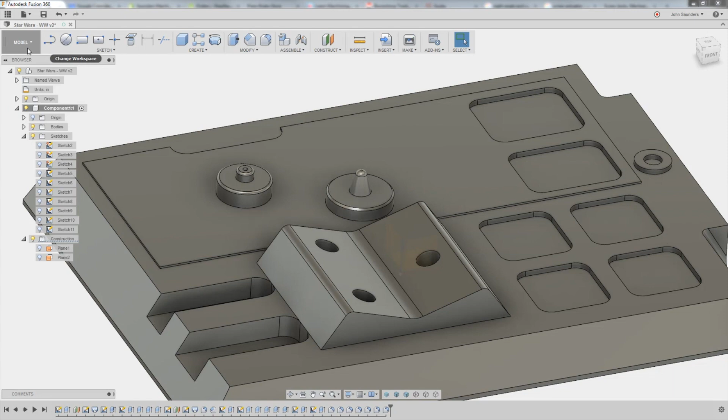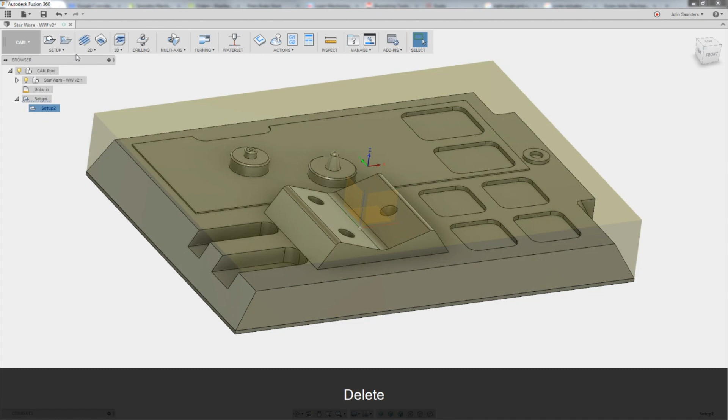New setup. It'll be a fixed size box, 8x6 by 1.22. Looks good to me. Okay, now the goal here is KISS, keep it simple. 3D adaptive, that screams shear hog. Never have liked the filters, at least so far.

Okay, here we go. I really should be using a template. I need to clean up my templates and then get them back to being used. We'll share our templates for sure once we get them fixed. Okay, so actually let me fix this real quick. So the bottom height, this is important.

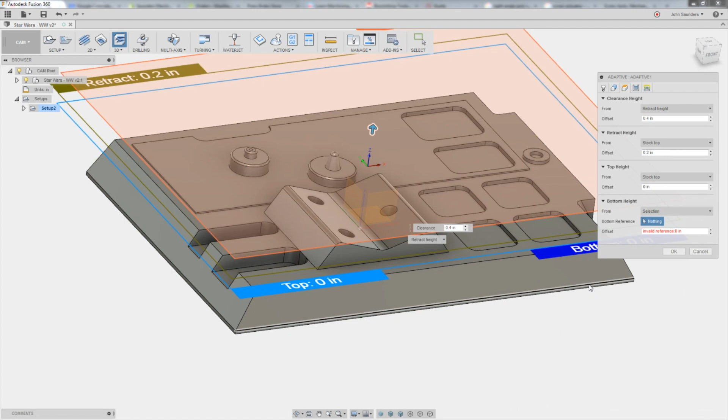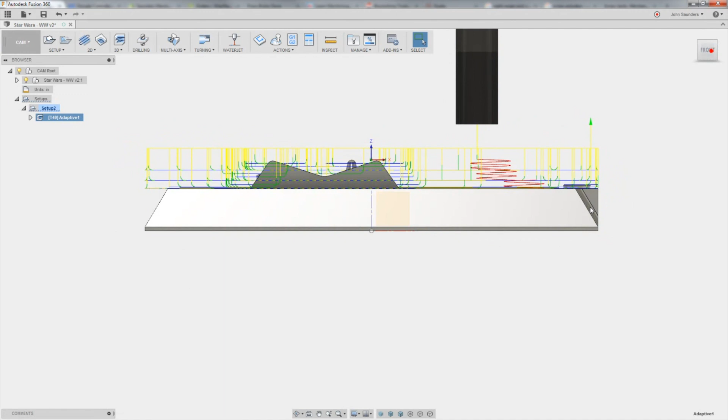So obviously we want 3D adaptive to take into account the various 3D features, but I want it to come down a little bit lower here. See how it's not getting any of this tapered? And we're just roughing it, but I still want it to do that. The reason it's not is under geometry, it's got tool center on boundary, so it's locking the tool path to this boundary, right at the center of the tool, that's as far as you can go. I don't really care here, so we can just say tool center, tool outside of boundary. See if that makes it any better.

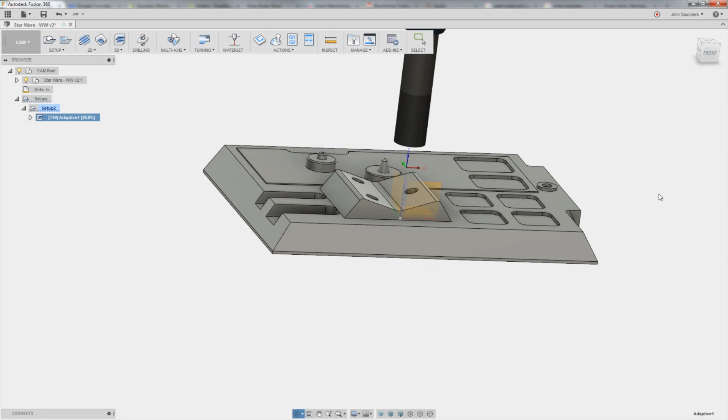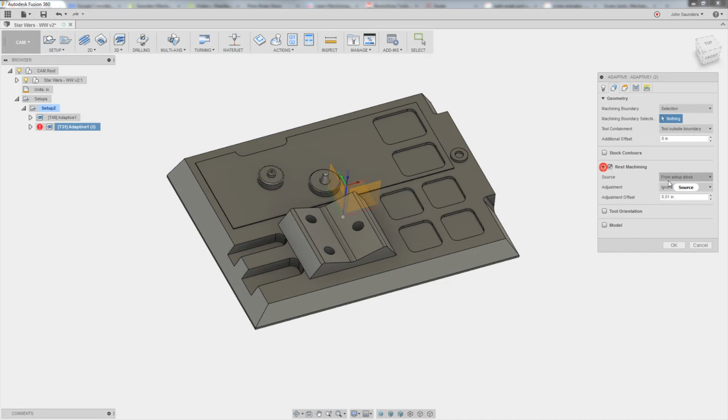Looks much better. Awesome. We'll hit Control D, duplicate that exact same op, but let's come in with a 1/4 inch square shouldered end mill for now to do the same thing, but then we'll check rest machining from previous operations, and that's going to go through and look at what's left to be machined. So in other words, what couldn't the shear hog get into? I'm sure it'll be some areas in here, hopefully some areas inside of here, maybe some corners, that kind of stuff.

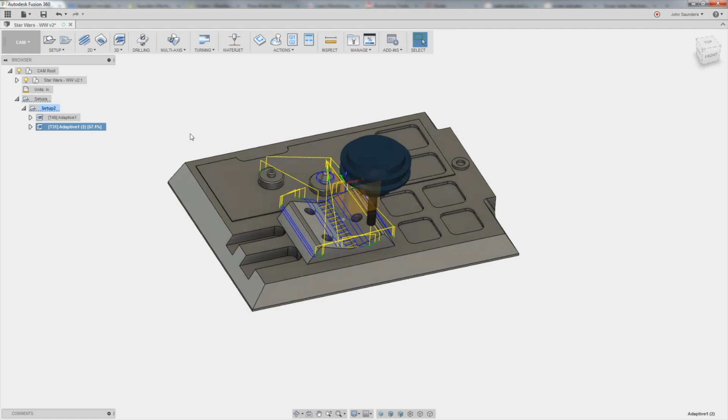These rest machining ops and the adaptive ops both take a lot more time to compute for obvious reasons. So if I get something locked down in this instance, I may want to right click on it and choose protect. That way if I hop in or if I do something, I don't accidentally force it to regen the whole time. So that's exactly what I was hoping to see.

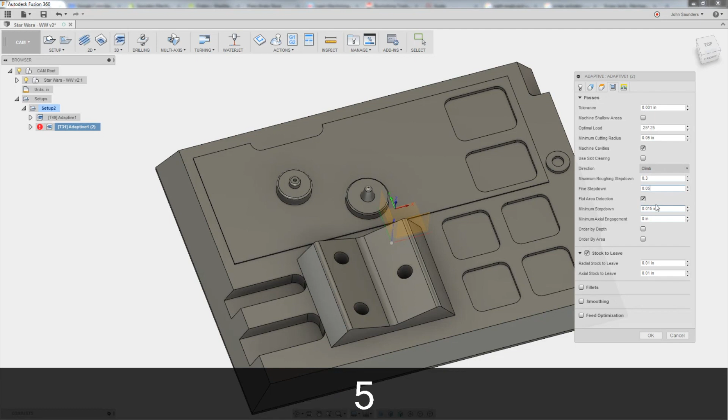I'm going to edit my step over here. Optimal load. Oh, that's because I adjusted for the shear hog. So I'm going to only go say 0.25 times 0.25, so that should be 0.0625. Step down can be 0.3. Fine step down 0.1 for now, and we'll say 0.05. Looks good. Click OK.

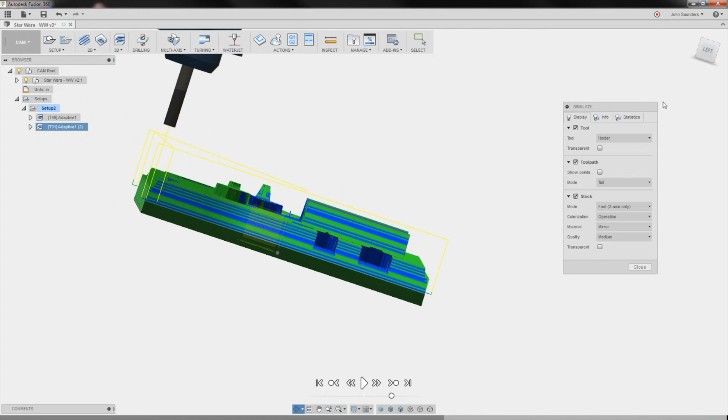Cool, so let's do a sim and just see what we're at, where we're at. Awesome, actually it's not really that bad. So I don't know, did it get? Yeah, I got some of that. Didn't get a ton of this side stuff. I think I'm going to allow the toolpath some additional offset because it's not going all the way down as far as it can. So under additional boundary, I'm just going to say 1 inch.

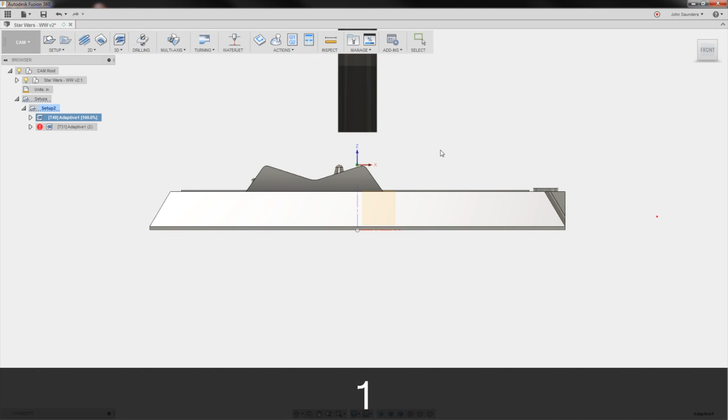That's way too much, but it's a smart strategy, so it's not going to cut air, and there's nothing else that it's going to collide into on the outside, the perimeter of the model. So this actually should do a better job. See that? See how it's now actually going all the way down as we would hope and expect? Great.

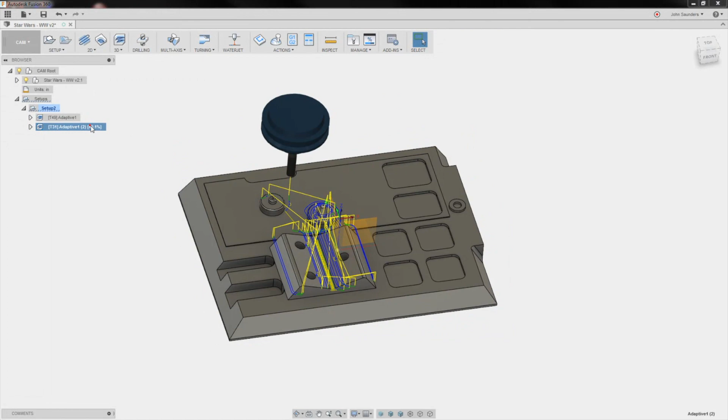So again, if you guys didn't watch the CAD video, this is my fun treat to myself. You know, I love machining, but when it becomes your job, it's different, and this is my fun part. I have no expectations here other than to enjoy the process. Hope that you guys learned something in the CAD video, and we'll go set this up on the Tormach, and we'll let her rip, and hey, you know, it'll probably be an hour or two toolpath, but you know, who cares? We're just having fun.

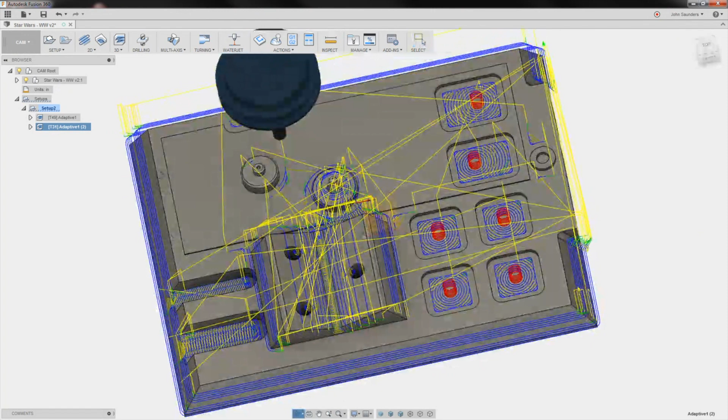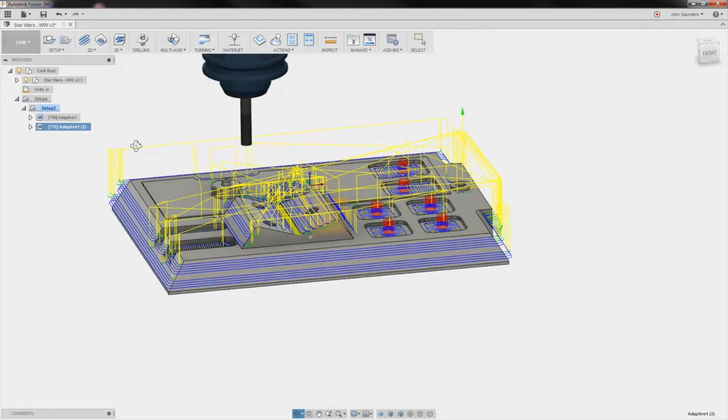Boom, boom, boom. Okay, so we got the rough shape out, a lot of these pockets are out. So here's the question, do I want to... I guess I'm going to come back with the horizontal and clean this up because we're still leaving some axial stock. With the shear hog, we need to. With the 1/4 inch tool, I wouldn't always do that, but horizontal will be good here. It'll add a little bit of time, but that's okay.

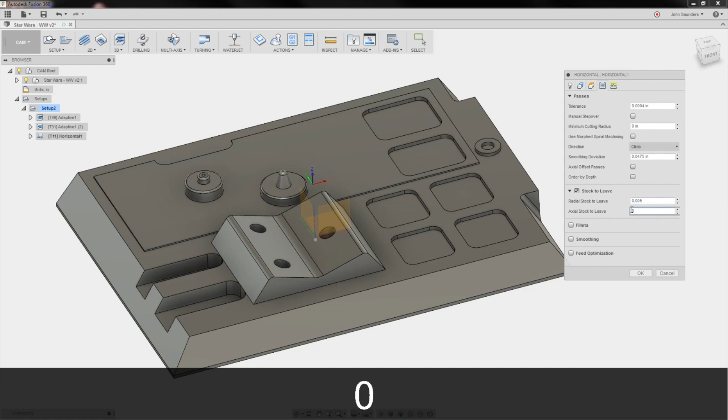So let's say 3D horizontal. And you know what we might do? I might actually switch over to, I've got this tool that I don't use very often, tool 11. It's a roughing end mill, actually does a great job with floor finishes. It's from Maritool, sort of ironically, I don't think of them as always the cutting tool source. And what we'll do is we'll do stock to leave. It's a corncob end mill, so I don't want it to touch any of the sidewalls. So we'll say give it 5 thou radial, but obviously no axial. Let's just click OK and see where it generates tool paths.

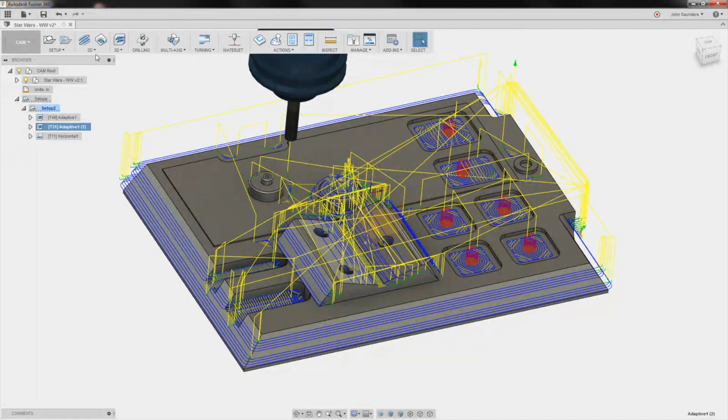The nice thing about the half-inch tool is obviously it's got a little bit of a bigger cut area, so it'll all else equal go a little bit quicker. Sweet, did it get? Yeah, got that. So let's go do some 2D contour cleanup stuff now. We'll do this with tool 31. So this guy, there.

Can I fit around here? Yeah, I should be able to fit around here.

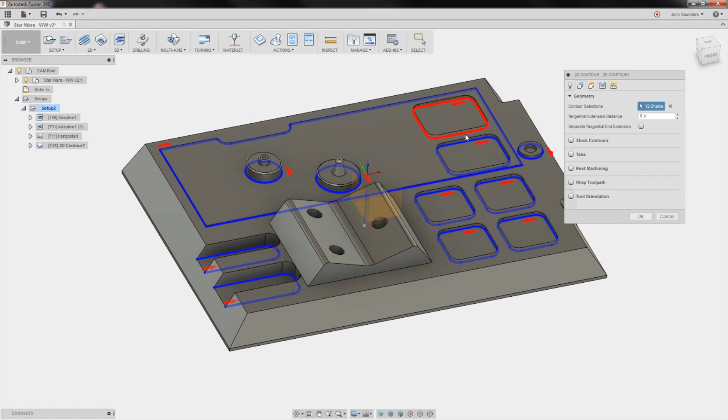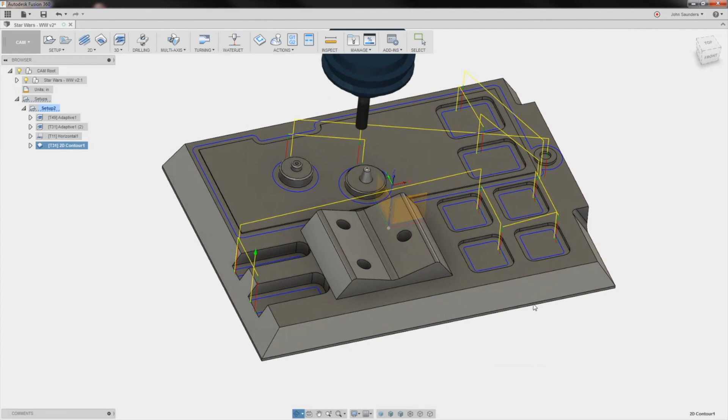Now on this stuff, one of the things I like to do, if I've already come in with a horizontal and cut the floor, in theory our floor should be good. So to try to avoid an additional tool mark on the floor here, because I'm only focused on cleaning up sidewalls, I'm going to say stock to leave nothing on the side or radius, but on the axial, I'm going to say half a thou above it. Now, obviously you need to make sure your tools are very, very dialed in on their measurement heights for this to work. But if you do it correctly, then it should work and it should help prevent that floor finish from happening. Cool.

So take a look at a simulation. Fast forward through everything. So one of the problems is we've got this little area right here.

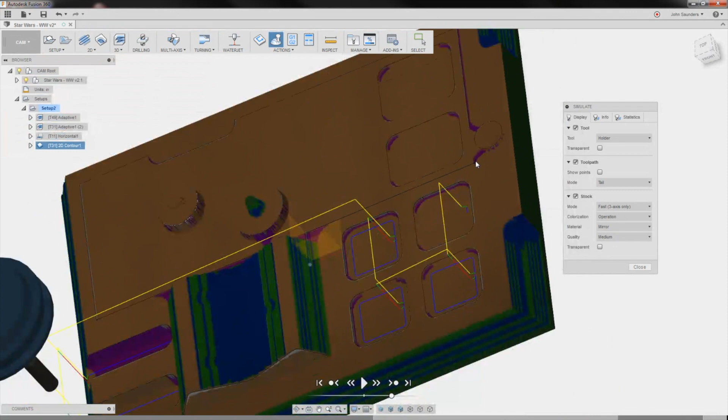So let's fix that. We're going to do a 2D contour. Let's actually do it. Sorry, let's do a 3D adaptive. You'll see why in a second.

We'll pick a small tool. Say, I don't think 1/8 of an inch is going to work. Nope, I can already see that that's smaller than that. So let's create a new tool.

Flat end mill. We'll say 1/16, 116, and we'll call it 1/16.

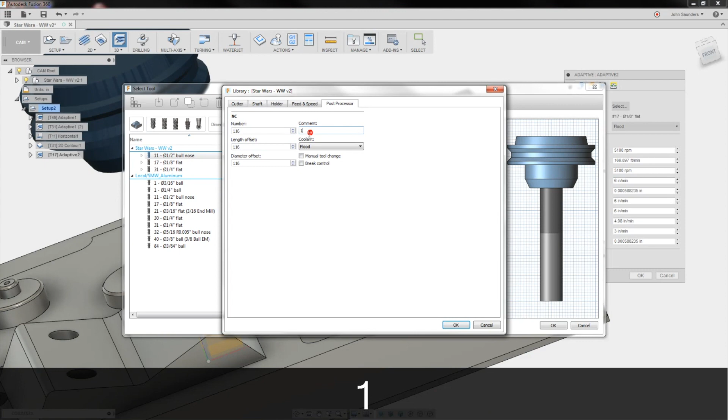Now, if I just click, see the problem if I do a rest machining is that it's probably going to take forever to compute because it's got to analyze the whole model. So I think what we're going to do is create a quick sketch over here to constrain it to this area. Let me pause it here.

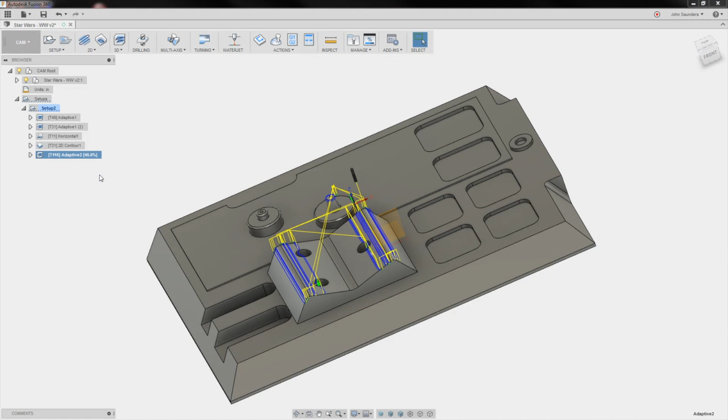I'll let this fast forward and see what happens. So it's been a minute. It's not even half done, and you can see it's farting around with toolpaths over here. Not what I want. So let's clear toolpath.

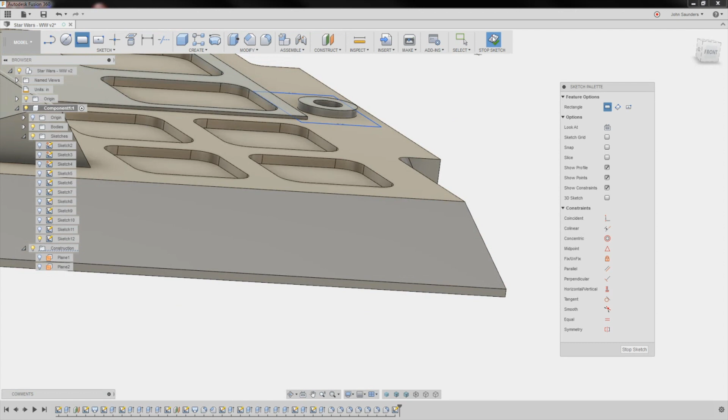Hop back into model. Rectangle, doesn't matter what plane it's on. Say right here. And let's just drag a rectangle around this area. Stop sketch. Back into cam.

And this adaptive, I want to say machining boundary selection of this. And don't need rest, yeah rest machine actually is smart now. Cool. So same stuff. And then look, boom, focused in just on this area.

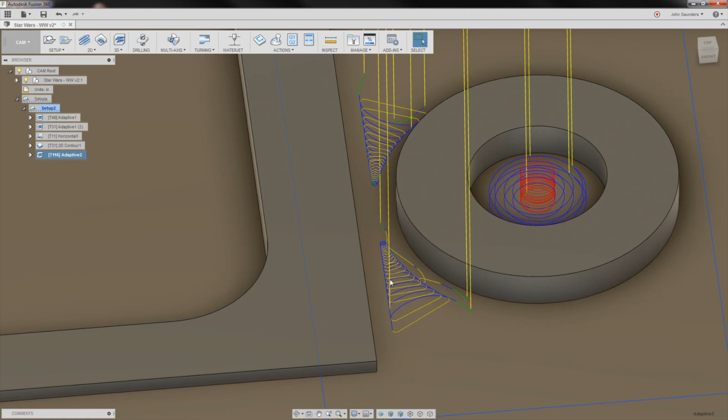Excellent. Make sure you turn that sketch off. One of the biggest mistakes folks make in Fusion is leaving sketches on. It can cause major accidents on operator error stuff.

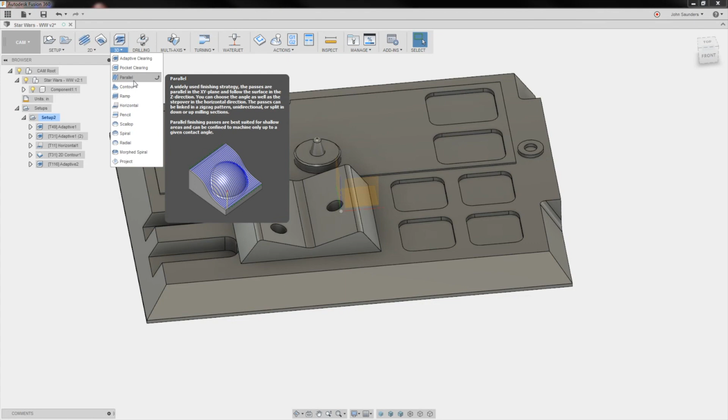So let's see here. I now want to handle the parallel or 3D toolpath of this. So let's switch to a ball end mill with a 3D toolpath, and I am going to try parallel. 1/3 inch ball end mill.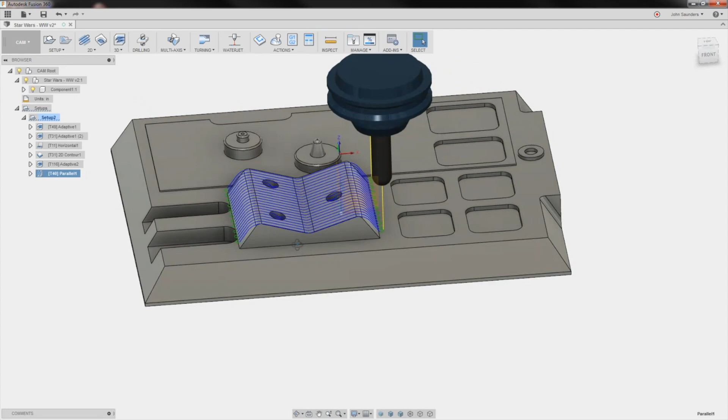Click OK. Machining boundary will be this. Step over, so I just leave it rough at like 0.1 for now. And let's make sure I like what it's going to do. I do.

But again, we've got a couple things. We need to refine the step over, but we also see how it's stopping right there. This is another example of tool center on boundary. It's leaving the center line of the tool.

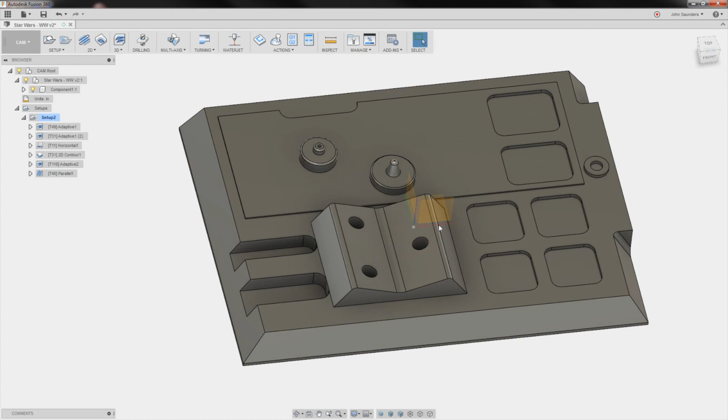So that's the lead in, but the blue is right at the edge of the part. I want it to come off a little so that it gets closer to. Now, in theory, not theory, in practice, we can't machine this all the way down perfectly unless we took a square shoulder tool and interpolated up from the bottom. Not the goal today, we're just having fun.

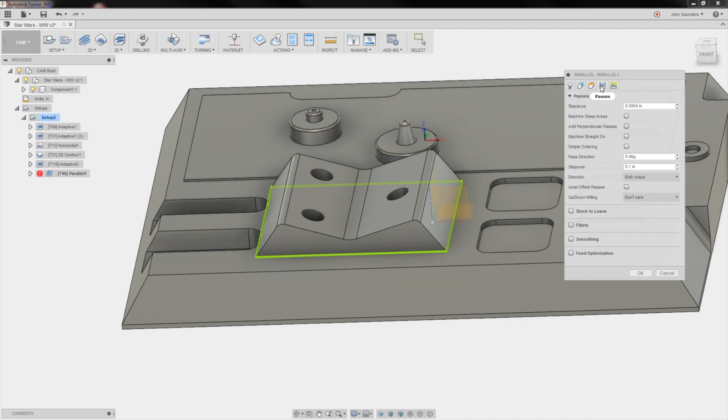So let's see here. Offsets, tool outside boundary. And again, it should not ever gouge our model, which is great. 0.05, we'll just narrow it down real quick to see what it looks like.

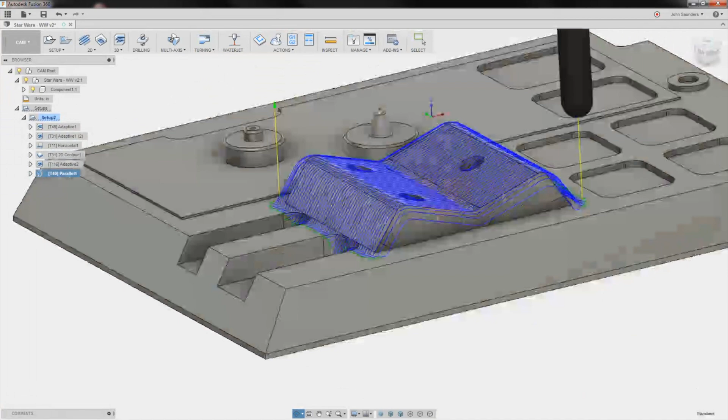Looks good. Let's do that Rob Lockwood trick of saying contact point boundary and see if that gets rid of some toolpaths. I don't remember why it wouldn't do that there.

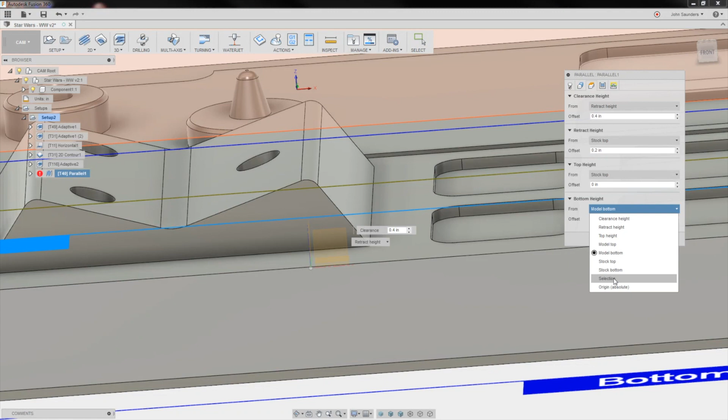Now I don't really want it to dive down in there, so what I will do to fix that, in fact what I'm going to do in general to make sure it doesn't ever gouge, like you can see it's leading in, it is in theory machining on the floor here. We're going to say the heights, bottom height will be this plus 0.001. So it's not going to dip below there. Great.

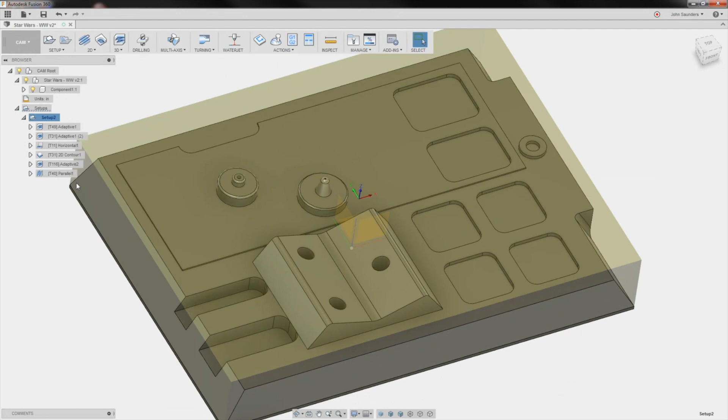Awesome, I like that. You know what, we're actually going to leave it like that, step over, and let's see if it gives it a kind of a cool texture. Let's grab a 2D adaptive with a 3/16 end mill.

And do these little pockets. In this case, I know I say don't ever use adaptive for finishing strategy, but I'm fine with it here. Click OK.

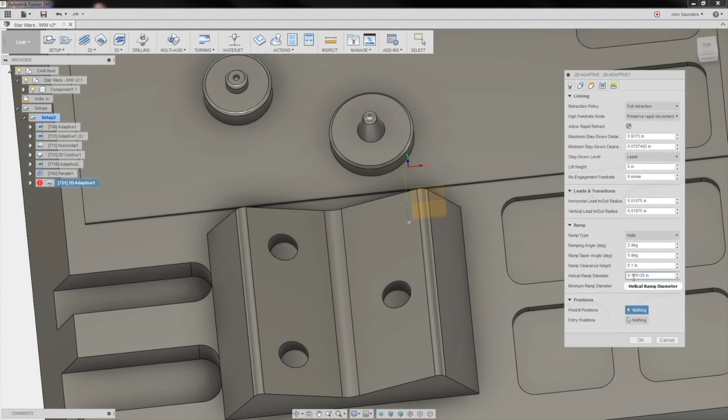Ooh, you ever get that error with adaptive? It's almost certainly your helical ramp diameter. So reduce that to say 0.01 for now. Make sure it works, and you can see it does.

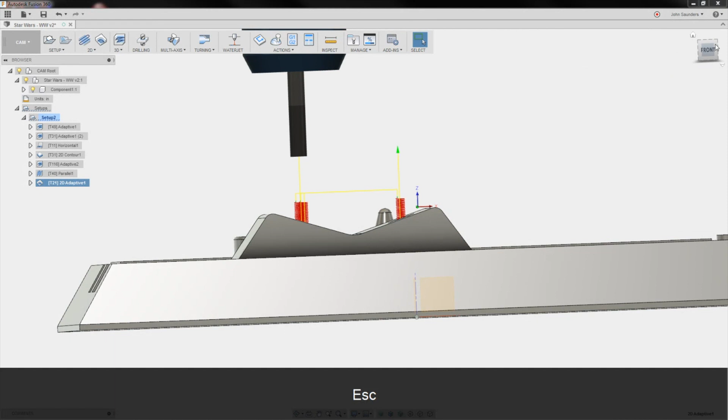Now I can get an idea that I can expand that out a little bit. 0.1 ought to work, actually. Yep, perfect. Reduce the... see how it's so much red? There's like all that extra red above the stock. So if you go to the same setting, it's got, because the ramp clearance height is 0.1 inches above, 0.01 is fine. In fact, we'll make that default for everything in Fusion, for me at least.

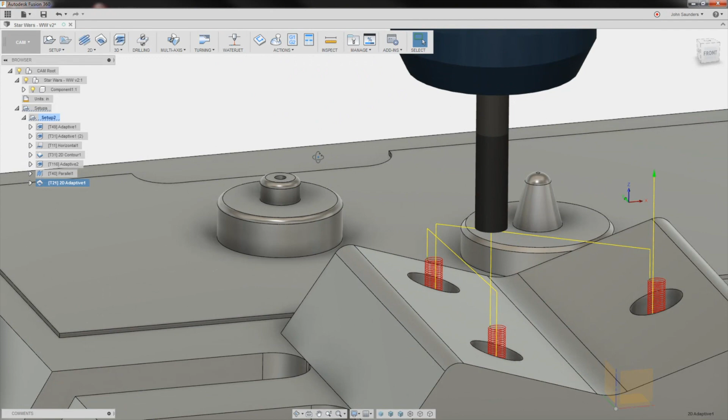Okay, so this is going to be a chamfer. That's a fillet. Let's do some work on that.

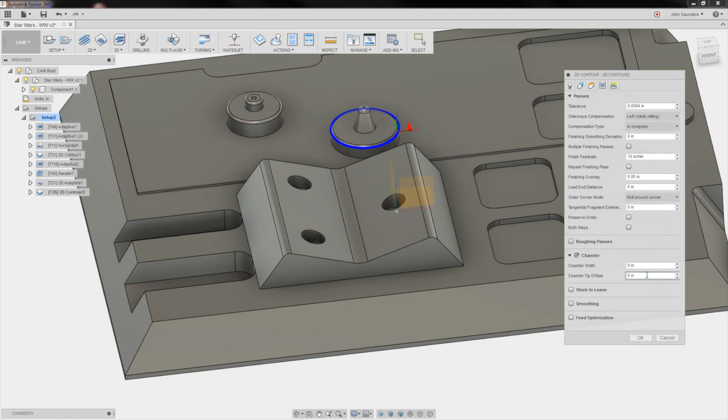Now, I am not great at some of these little 3D fillets, but I want to get better at it, so let's give it a try here. 3D contour—somebody tell me in the comments below what's the right toolpath I should be doing here. I definitely want to use a ball end mill, so 3/8 ball.

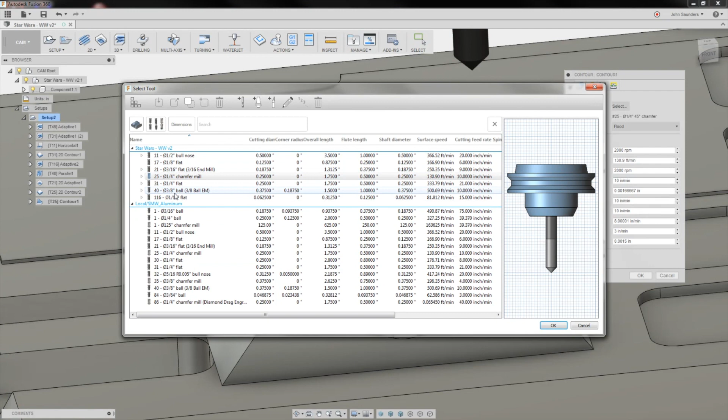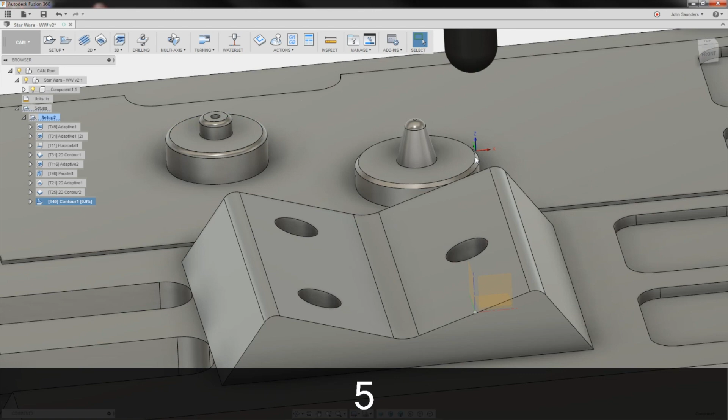I'm going to click here, and let's say contact point boundary, and maximum step down 0.05 thou. Click OK, see what we get. I need to learn this stuff better. Ooh, wasn't what I expected.

Okay, well let's control the height, use the height. Yeah, let's use heights. Well, I wonder if I can do avoid touch. So touch surfaces, click on this fillet. This would be awesome if this works right.

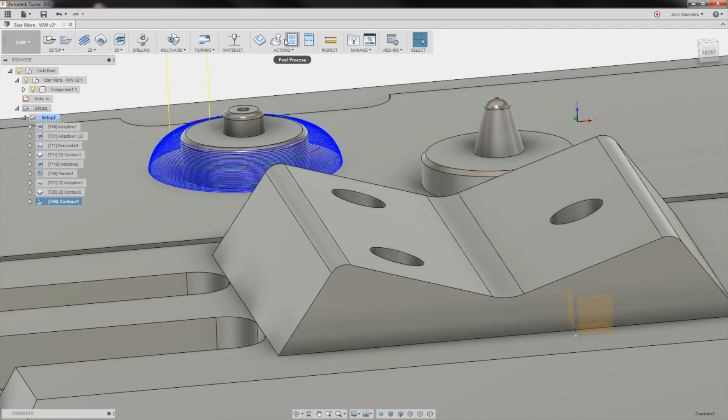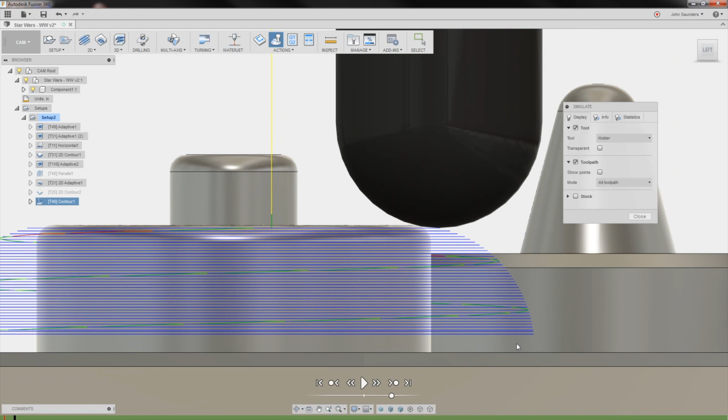Why is it wasting all that motion? Simulate, no stock. So that's, see here, click here. Okay, that's fine. I agree that I should cut there, but it shouldn't be cutting. Yeah, that's way past where it needed to be cutting.

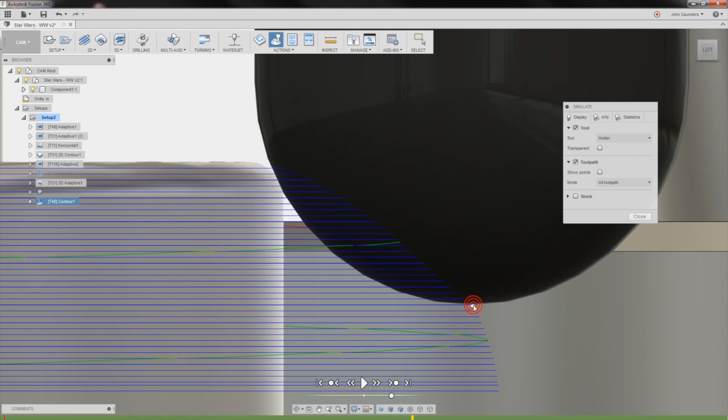Well, it needs to cut there. Maybe it is. Yeah, maybe that's okay. God, that's too many step downs.

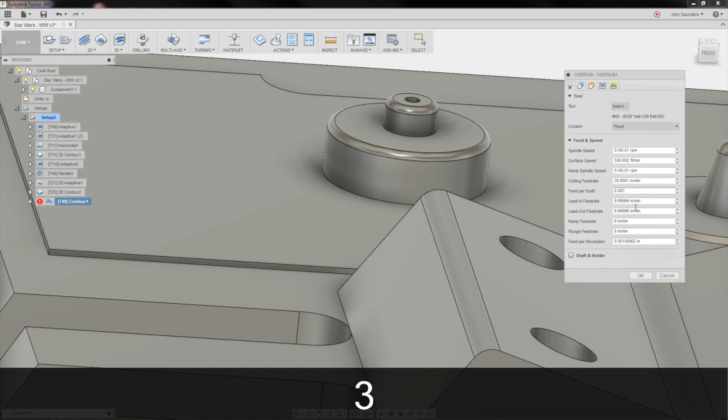All right, rather than fumble around with it, we're going to say maximum step down of 0.025 or 25 thou, and what else was I going to do? There you go, but that's still absurdly slow. We can go way faster. So something like this, max RPMs, we can go 3 thou per rev, because we're cutting a very thin profile here.

We'll make that up on our to-do list of things I need to learn and share with you guys and get better at, because that's an important modeling skill.

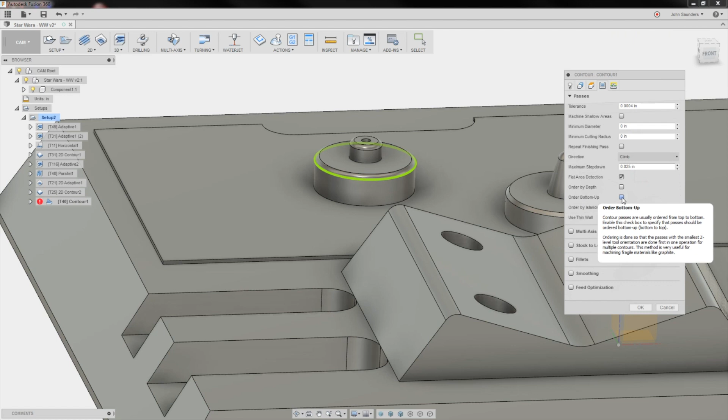Well, the last thing I want to do, this is important, is under passes. If I do bottom up, that should machine it from the bottom up, which is great because I want to cut more with the side of the tool than the tip of the tool, if at all possible.

Let's do a simulation and see, does it do that? Yeah, that's great. That, again, you've got much better surface footage and better strength in the tool and better gullet area for the chip to clear out and so forth down there. So it walks it all the way up like so.

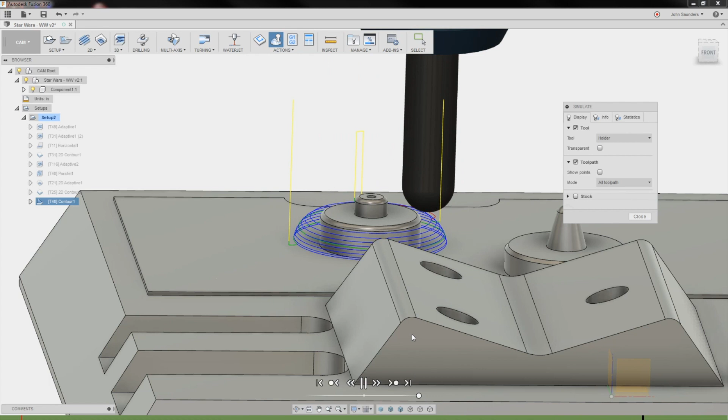Great. Let's hit Control D, and let's do that now again. Probably can leave—I'm not even sure the selection matters. If I change that to that, see what happens.

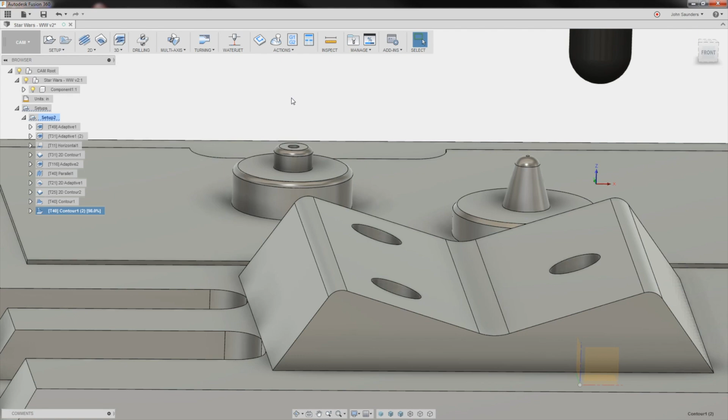Cool. Just want to make sure I don't want it to touch that floor, so I'm going to do height, bottom height would be selection of that plus 0.001 just to stay off of it.

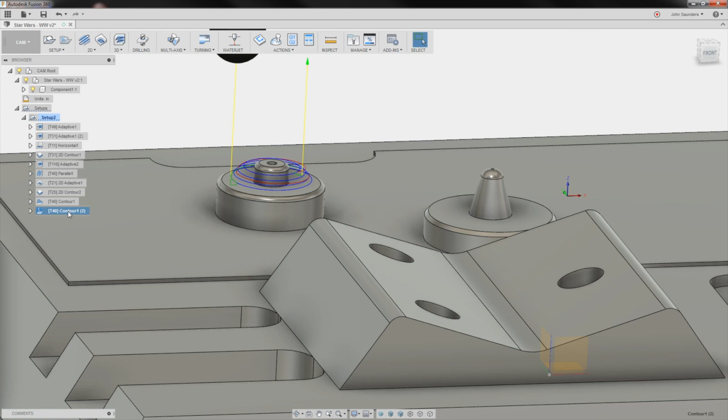And I'll Control D, edit the new one. Excuse me. Touch surfaces now. I'm going to do this and this. We'll say heights, selection of this plus 1 thou. Click OK. Cool.

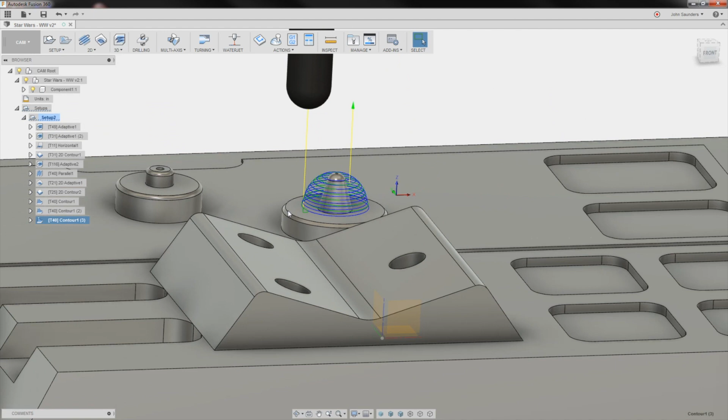I like it. So the last thing I'm going to do is put a little spot drill right in here, and we'll do some quick chamfering as well.

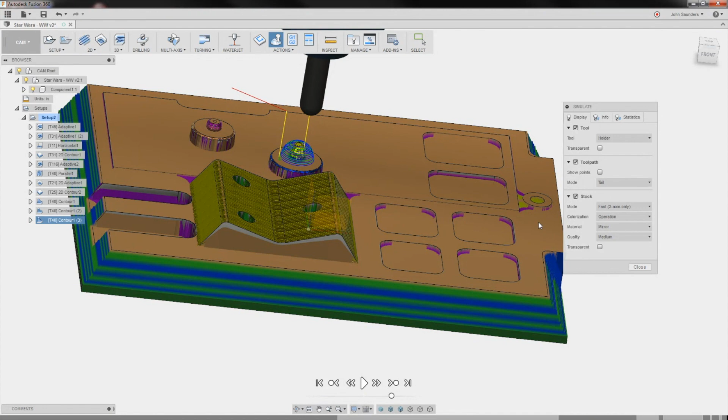2D chamfer, and this is great because what we can do is deburr. So I don't want to do that whole thing. Let's hold down an Alt key, and that'll let me pick exactly what I want, which is these lines. And the 2D chamfer has this built-in 3D model collision. So as long as I stay, say, 5 thou off the model, that's great.

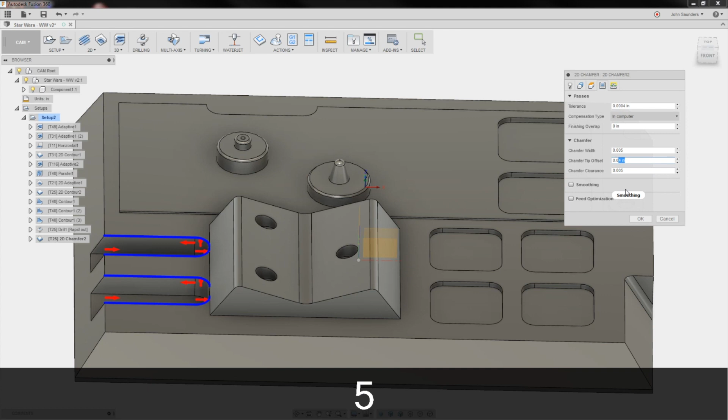We're just going to do a 0.005 chamfer, 0.6 offset. The more offset you do, the closer that tool can get to some of these inside corners, which is great.

And we'll do a quick chamfer as well on these guys. So I want to make sure I don't crash. Switch over to wireframe view. Link in the video description on how you get this little plug-in down here, which is great.

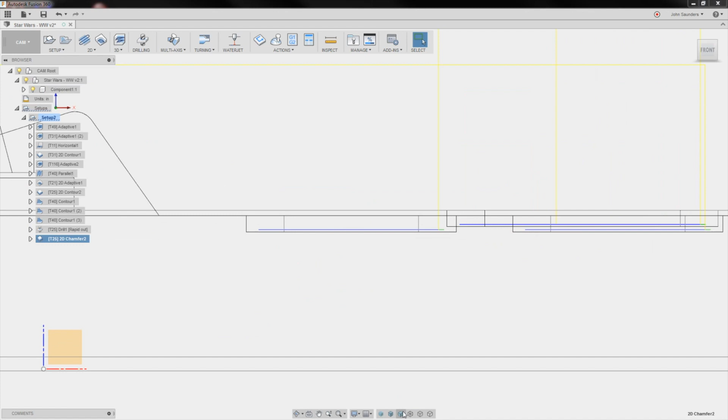So it looks good. I don't think—oh, we would crash right here. Okay, so let's just reduce the offset. You know what, I want to leave the offset. We'll do it as a separate chamfer op. Duplicate it.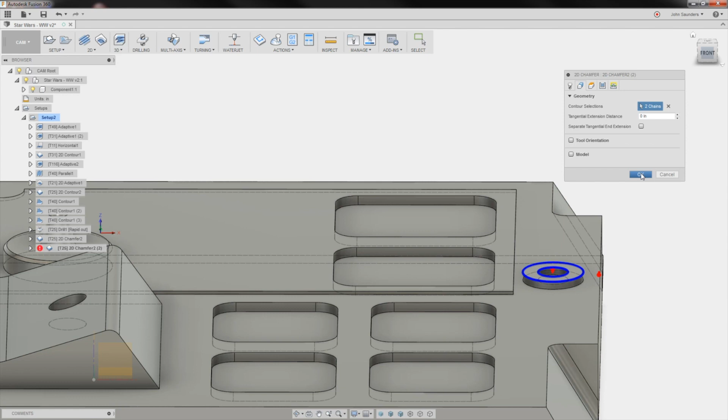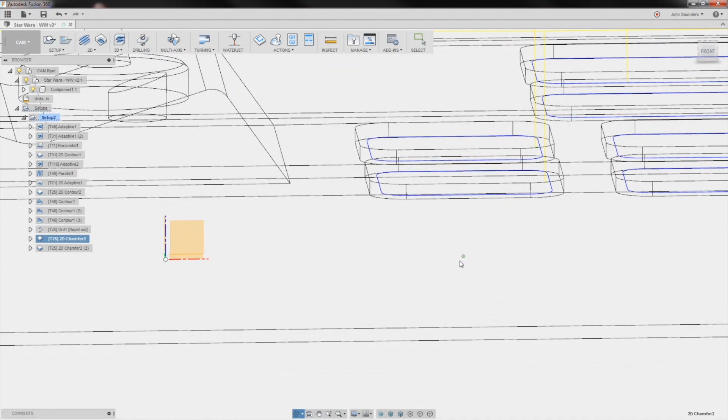Hold down Control and I can deselect them from this one. Okay, so look at the wireframe view here. We should be good. This is a little bit risky that you misread a blue toolpath line relative to the solid model, but I think we're okay.

You know, if we look at this one here, that should be okay. And then when we look at this one, now the next one, we can see we're not going to crash there. Cool. All right, we're going to call that a wrap for the cam.